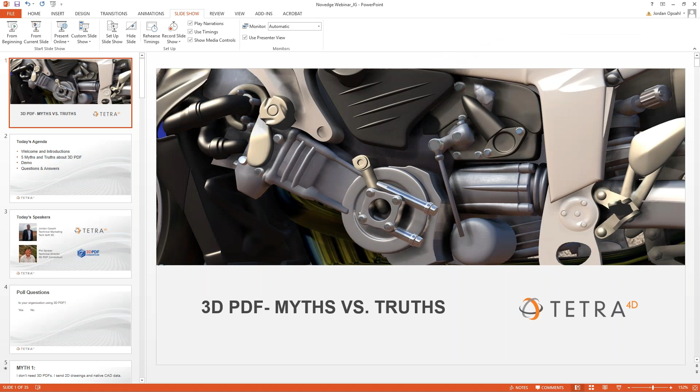Well, welcome everybody to 3D PDF Myths versus Truths. We're going to go through a quick housekeeping item with today's agenda, and we'll dive right in. So we're going to do some welcome and introductions. We have 5 myths to talk about today around 3D PDF. We have a couple demos, but a more deeper demo at the very end, and we encourage everybody to ask questions, and we'll provide answers at the end of the webinar.

As Barbara mentioned, my name is Jordan Opsahl. I do technical marketing here for Tetra4D on our end user product line, and joining us today is also Phil Spicer. Hi everybody, I'm Phil Spicer, the technical director for the 3D PDF Consortium. We do evangelization and promotion of 3D PDF in the engineering workspace, as well as working on the 3D PDF standards. So I'm very happy to be here, and thanks for having me.

Great, thanks Phil. All right, well to get things started, before we jump in, I'd kind of like to get a gauge from everybody and see how many of you are currently using 3D PDF. So Barbara's going to go ahead and start a poll, and if you take a moment, please answer if you're currently using 3D PDF or not, and we'll give you guys a little bit of time to answer.

All right, looks like most of our attendees are not currently using 3D PDFs. We have 18% yes and 82% no. So off to a good start. This is the right place for you if you want to find out more about 3D PDF. Well, that's exciting. I'm glad that there's a lot of people on the call today that don't know about 3D PDF, so I think this will be a great introduction.

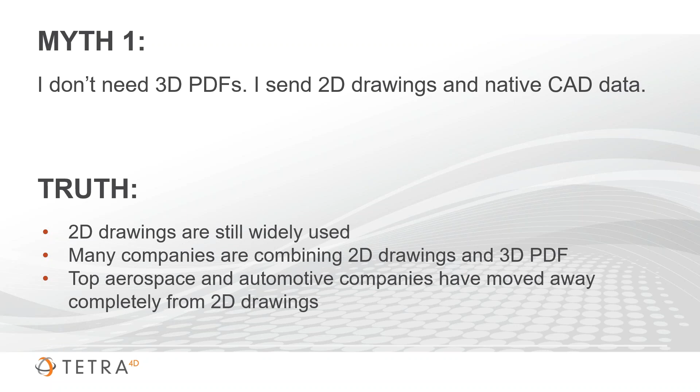So we're going to see how this has evolved over the years and how we've gotten to 3D PDF today. We're seeing dramatic improvements in how we're delivering engineering data, and this has taken some time. As we mentioned, many companies are still using 2D drawings, which is just fine, combining them into a binder. This is great—we've collected all the data, and it's more organized.

Over the years, we saw a shift into companies starting to do this digitally. What most of you are probably doing is sharing your 2D drawings inside a PDF, which is much more efficient in electronic form.

But now that everything is designed in 3D and 3D applications, many companies are starting to see the value, and customers are demanding being able to provide all that same information contained inside your drawing, but as an interactive 3D PDF, with all of it still consumed inside Acrobat Reader.

So we're going to show you a quick demo of how you create a 3D PDF with one of our tools and exactly what a 3D PDF looks like.

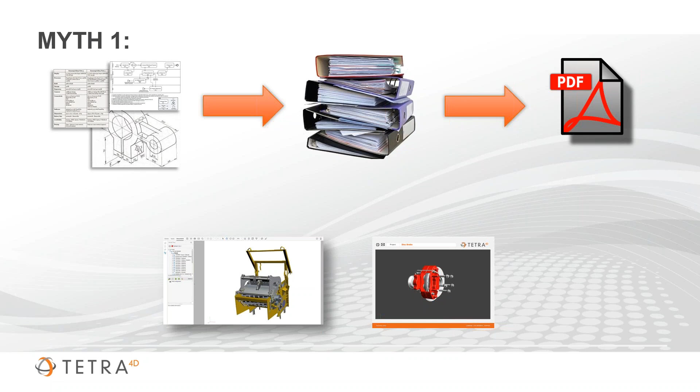With our Tetra4D Converter, we support over 20 CAD formats. There's a variety of ways you can create one: File, Create PDF from file, or you can grab your directory and drag and drop a CAD file into the application. Or I think the easiest way is to right-click and say Convert to 3D PDF.

So we're going to get our converter tools here, and I'm not going to go through all these in a lot of detail, but we can control the background color, change the lighting and how we want the lights to appear, and the rendering style—solid, outline, or illustration—and these can be adjusted as you get into the document too.

We have our view orientation, so it knows it's a CATIA file—I want to set my views being rendered as CATIA, and some other default options as well. We have a template option. Phil's going to talk about security and how you can secure your document.

From here, we get to control what information you want imported. We have full support for PMI and views, solid surfaces. And then finally, what type of PDF do you want—geometry or just a tessellated model? And then finally, we have compression.

The first thing you're going to see is this 3D toolbar. This just changes how you navigate the document. We can change from pan to zoom in and interrogate this a little bit more. We have some other options in the toolbar as well.

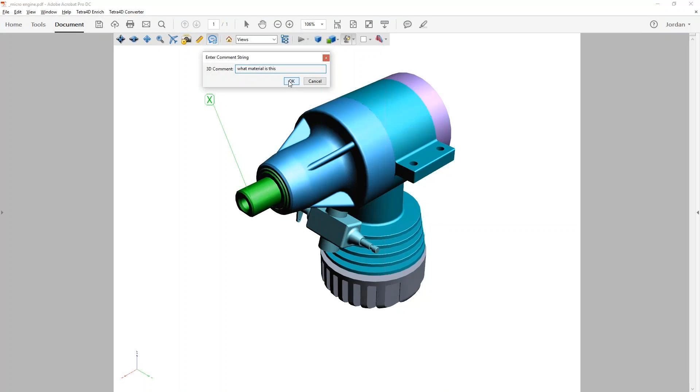For example, we can take a measurement. A really great collaboration tool is creating a 3D comment. So we can come up here, add a comment, and say, if we were curious what material this particular part is—we can enter that in right here and say, what material? Select OK. Now we have that 3D comment, and it actually got saved as a view, which we'll talk about a little bit later.

I can have access to my views here, so that 3D comment was just created, and those are all the views native to our CAD file. As I mentioned, we can change the rendering style back, and finally we can cross-section and create cutting planes in our model.

I'm going to hit the model tree here and open this up into Adobe Acrobat Professional. This would look the same in Reader as well. We can select in the model tree and have it highlight into our 3D model.

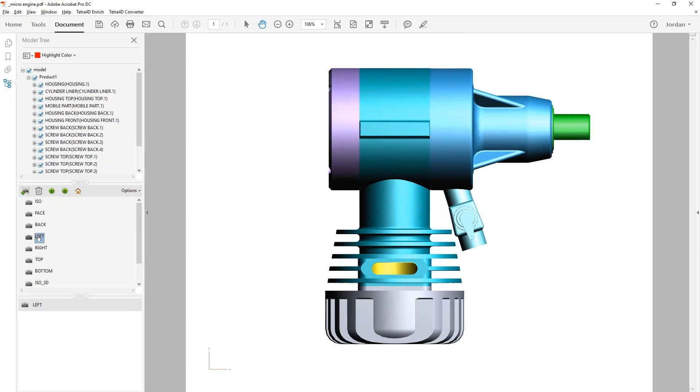This will change as I move through the model and select on the tree—it'll highlight those different parts. You also notice we have a view panel, so again, these are all of our views that were native to our CAD file. We can go ahead and select the bottom view or even the ISO 3D. And that new 3D comment that I made is stored inside our view panel here.

So again, there's still a lot of value in being able to provide this over a 2D drawing. Go ahead and go back to our home view. The last thing I want to point out is that you can also populate some attributes or metadata that was native to that CAD file. So again, the idea here is that you can still include all of your drawings inside this PDF, but having this interactive 3D model with all those CAD views is a very valuable tool for people.

And Phil's going to tell us next about the next myth around 3D PDF.

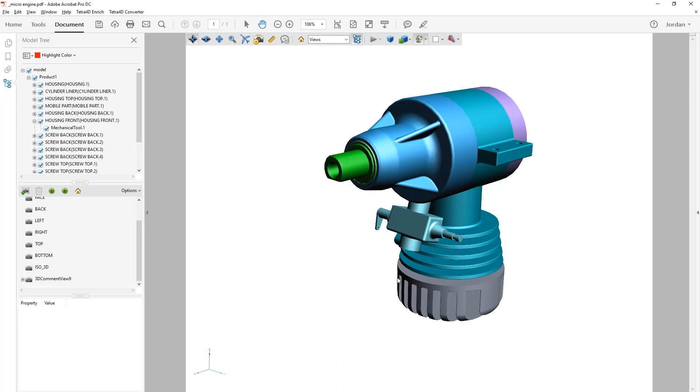Myth 2 is I don't need a 3D PDF because I can just zip all my files together. And while it is true that zip files are one of the most used formats for grouping and storing multiple files, for structured data they're often confusing and maybe not the best format. When I receive a zip file, the first thing I have to do is figure out what each of those files in it are. And many times people put a readme.txt or some other kind of manifest that tells you what everything is, and you have to go back and refer to all that.

In comparison to that, 3D PDF files are really good for structured data. One of the lesser known features of 3D PDF is that you can compress and organize multiple files all into a single PDF file. And you can do that using one of two functions. First is called attachments, and that just attaches them. The second one is called portfolios. Portfolios allow you to put folders and other types of things into your PDF file in addition to documents, and it gives you a nice visual user interface that allows you to navigate through all that and makes it easy to understand.

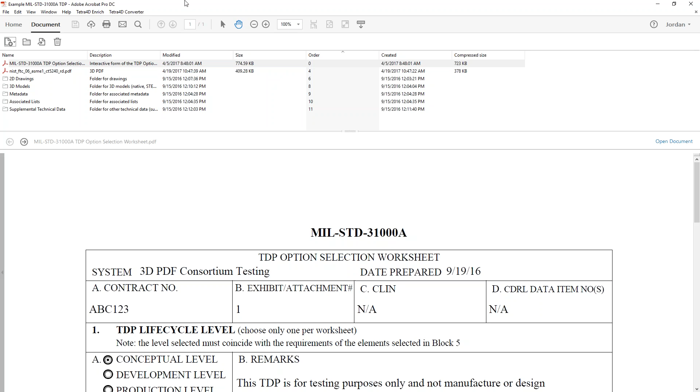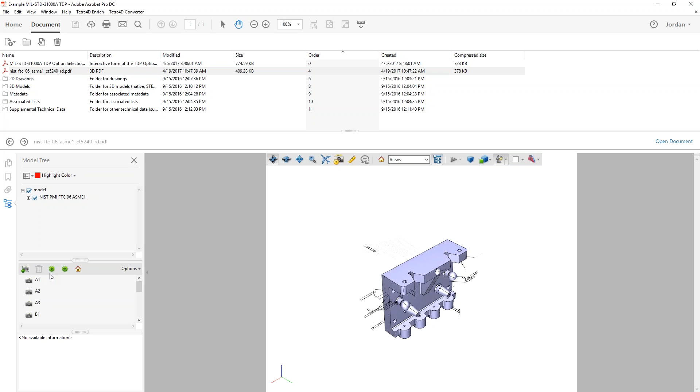So in this you'll see up at the top we have a little interactive environment that we can look through, and it shows all the files that we have in this. The first one is this form, the Mil Standard 31000 form, and it's actually a fillable and viewable form. You can use this interface to cycle through your different models or files that are in your PDF file. Here you'll notice we moved on to this NIST 3D PDF. You can activate that, and move through the views and other things, like Jordan just showed you in the previous demonstration. So all that feature functionality is already available there.

You can also add folders, and here you'll see I've created a folder for 2D drawings, where you can put your drawings.

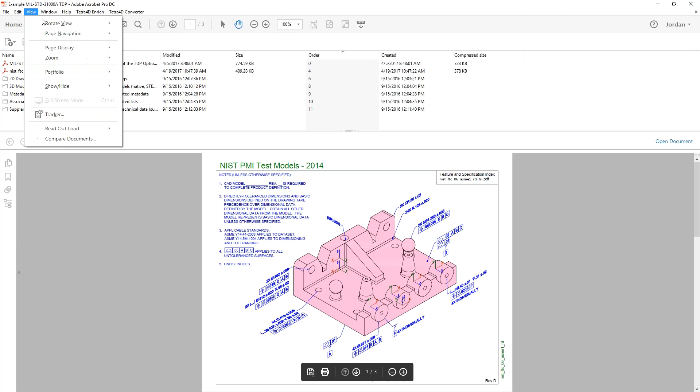Models and metadata, associated lists, all those things are available in here. You can go ahead and change the way you view these in a portfolio. Right now we're showing the details, but you can also look at it in a standard layout kind of view. And then finally, you can look at what we call the cover sheet.

The cover sheet is what's displayed when a viewer doesn't support a portfolio. So if you were to open this in, let's say, Chrome, which does not support the viewing of portfolios, this is what you would see, and it would tell people to go ahead and download Acrobat in order to better view that model.

So let's go back to our detail view there. You can also search the entire portfolio as well. Search functionality works across all the files inside your portfolio, and we'll find anything in there.

And then finally, we'll take a quick look at the portfolio properties, and it should allow us to take a look at some of the things. We put titles and other things in here. This is all available. You can get this data via an XMP format.

And you can also add security. Default is no security, but we can add password or certificate security. We'll go ahead and add a password. And when we do that, you'll see that we can go ahead and require a password. We can restrict things so that it doesn't allow printing or only a specific resolution.

And we can go ahead and see what changes they can allow, so they can insert pages, comments, and all those types of things. You can specify directly in here. So when you're done, you have a single PDF file that contains a whole bunch of other files, all in a single compressed and highly secure package. So we think that it's a really great way to deliver multiple documents in a single file.

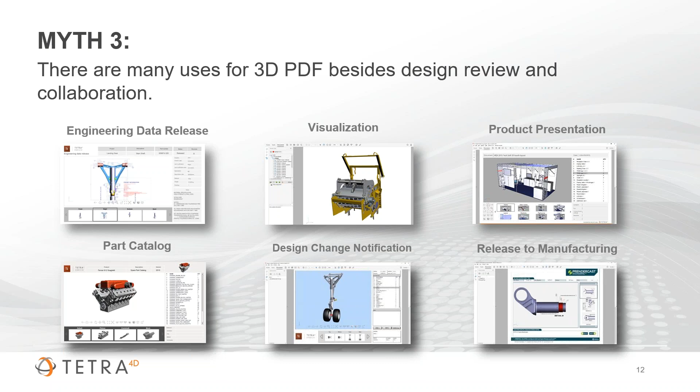So this is a technical data package that we created. We have our 3D scene that we saw earlier. We can easily go ahead and cycle through views with these easy access buttons.

So again, these are our native CAD views, with support for exploded views, and we have full support for that product and manufacturing information in there as well.

So the next thing I'm going to do is change how we pan with this. I can go ahead and cycle through my pan mode. Again, I can interrogate this by zooming in and out, and the idea is to make these tools more easily accessible so that anybody can interact with it.

So right now I quickly isolate a part. Say I wanted to change rendering styles to illustration, I can go solid, outline, or solid, and quickly go back to my home view as well.

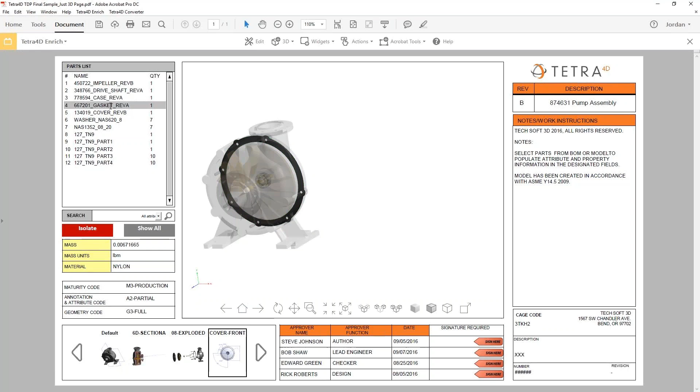So the next thing that I want to do is select on my bill of materials. You'll notice it's going to flash a bright green color to indicate that's the part that I'm selecting on. Right now I just selected the shaft, and so I know clearly that's the part that's associated to my BOM.

And the last thing I want to show here for properties is that when I select on this part, it's pushing that property information into that text field there, and that changes as I move through each one of those parts. You also have the ability to search the document right here in this PDF.

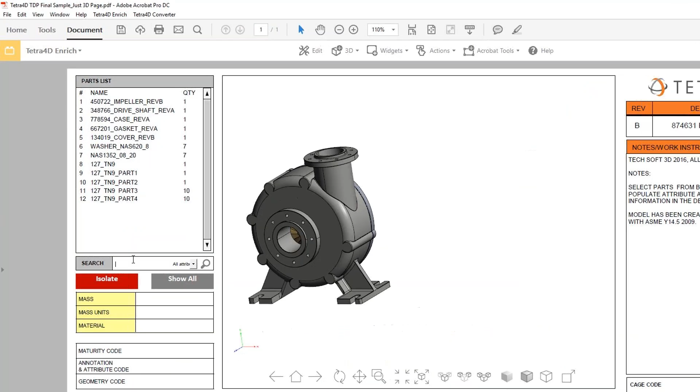So for example, I want to find all things made of steel. I know that those shafts and those bolts are made of steel inside of my model.

And then last, we have easier access to these views. Instead of having to navigate inside Acrobat, those views are easily accessible. And one thing that you're not seeing here is that we also have the original CAD file attached to this, and also those 2D drawings that created this technical data package.

So already I think you see that this is much more valuable than having just your 3D on a page, and much easier for somebody to understand and consume, and again, doing this all on Acrobat Reader.

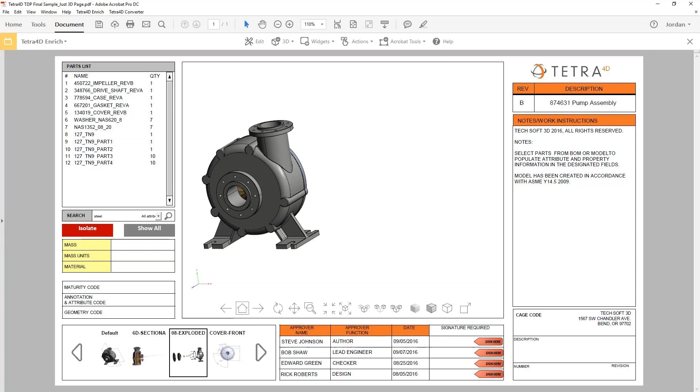Okay, coming in the questions. So far we have 50% of people using 2D drawings. Somebody's using 3D PDF, and somebody is still using zip folders. 20%, actually a few people saying the CAD viewer or native app is their solution. So, most of them, I would say 50% 2D drawing, 13% 3D PDF, 13% zip folder, and 20% CAD viewer or native app.

Okay, great. Thank you, Barbara, and thank you to everybody who responded. That's very interesting, and 2D drawings are still widely used, and we're seeing a lot of folks just including this 3D PDF in addition to that. So we'll talk a little bit more about that later.

Phil's going to take us into our fourth myth.

All right, so our fourth myth is that creating 3D PDFs is costly and inefficient. And that's really no longer true today. I'm not sure that that's ever been true, but certainly it's not today.

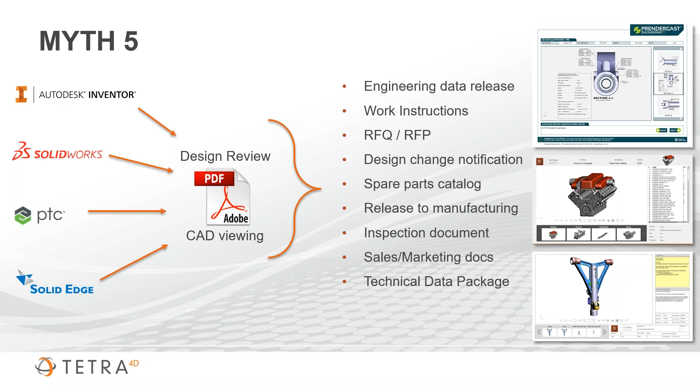But as we mentioned earlier, in addition to the cost of software, one of the things you have to really take a look at is how much you're going to save on the other end. And there's a bunch of studies that talk about the ROI that you get with this 3D PDF and MBD.

First, on the left here, an Aberdeen study looked at the cost savings realized when you have fewer inaccuracies and fewer errors introduced when you use a 3D PDF as opposed to a 2D drawing. That study showed that 60 to 70% of part errors or nonconformances are due to inaccuracies and interpretation errors you get using 2D drawings.

And you have to remember that 2D drawings always require somebody, a person, to interpret those. And because of that, they're often subject to errors in that interpretation. Then you have to go back and request a new drawing, or regenerate a drawing, in order to fix that. That's often a very costly proposition.

On the right, large manufacturers such as GE have reported they've reduced their tooling design times by as much as 75% using those model-based methods. GE Power, as a matter of fact, has made a large investment in moving to 3D PDF, and they've seen huge cost savings from that. It's even now featured in some of their annual reports, what they're doing. They're pushing 3D PDF out into their whole organization.

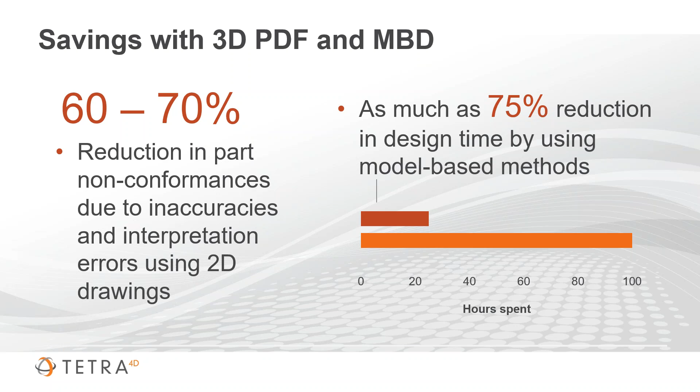So cost savings are something you always need to look at, in addition to what it's going to cost you to have that 3D PDF solution.

Now let's talk about one specific program at BE Aerospace that really kind of illustrates this ROI of the 3D PDF. If you're not familiar with BE Aerospace, they manufacture seats for aircraft, and they were working with Boeing on a first-class seat. These seats today are very, very complex. They have a lot of moving and mechanical parts, but they also have a lot of electrical parts. Boeing wanted to ensure that all the seats would meet their different requirements for electrical integration.

So they worked with BE on how they would do that. Now, in the past, what they would typically do is generate a 2D drawing and send that off to Boeing. These drawings were often very large and very, very complex. If they had a question, they'd ask for a new drawing that would give them even more information. And the drawings could take days or even weeks to produce.

And whenever there was an engineering change, those drawings also needed to be regenerated. So the cost of generating these was really high.

So Boeing and BE Aerospace took a look at turning to 3D PDF for exchanging their engineering data. They thought they would see some benefits from using the 3D model as opposed to 2D, and it turns out they were right. So they built a template that allowed them to integrate some BOM information into their PDF document, and they developed some custom JavaScript that allowed them to sort and filter the model based on different configurations. When they gave it to somebody, they could sort it, filter it, and view it in different ways.

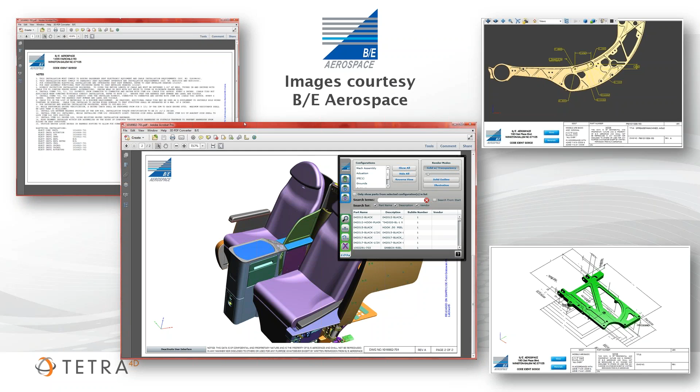And now Jordan's going to talk a little bit more about some of the PLM integrations in large-scale models.

Great, thank you Phil. All right, so coming into our last myth, myth number 5: creating rich, intelligent 3D PDF requires an enterprise-level solution or JavaScript programming skills.

As we've mentioned, the free 3D PDF exporters in the market are great for design review and sharing one CAD file type with others, and typically they're very easy-to-use tools. But the reality is these aren't tools designed for creating custom, interactive 3D PDF documents. And you actually don't need an enterprise-level solution to automate this process.

In the past, it was very common that you'd have to have a very heavyweight enterprise solution in order to automate the process of creating these. We've developed another tool that allows you to create these templates very easily on your own, and also a low server end solution to automate this whole process.

So now I'd like to jump into a demo on how you create one of these templates on your own and how to create one of these interactive PDFs.

Okay, so anything that saves to PDF can be used as your template or your canvas. I'm in PowerPoint right now. I have some text icons, some boxes, some text fields. I'm just going to go File, Export to PDF, give this a name and say Save. This is going to happen very quickly, but we're already inside Acrobat Professional.

This is DC Professional. We go ahead and access Enrich. The converter tool comes with Enrich. First thing I need to do is add my 3D.

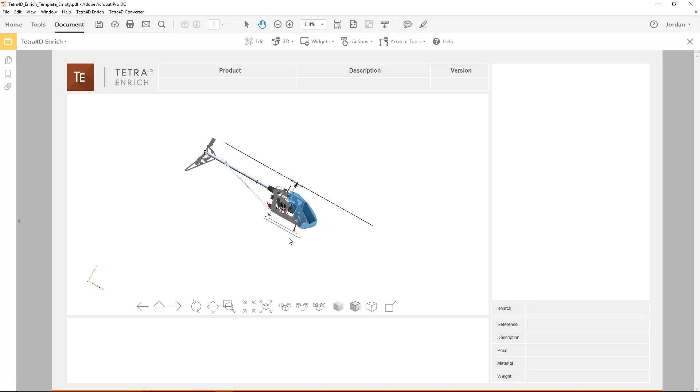Again, the converter tool is included with Enrich, so that CAD data translation technology is included with this Enrich tool. So we're going to let this finish off, and it's going to go ahead and populate our CAD file into our 3D scene here. So now it's active. We have our 3D model.

The first thing I wanted to do is add a parts list, a variety of ways. I'm just going to do a flat parts list, so again I just draw the size of my bill of materials here. So it pulled in all that information from our CAD file, and now I get to format it.

So I can change the size of the text here. I can change the type of font that I want. I can also change how I want this to be emphasized when I select on that, so I change that to green. I want this to flash like we saw in the sample earlier. And I also want to go ahead and show that you can edit this table.

You can add, remove columns, and even input new data into there. So right now I'm going to go ahead and see what metadata was included. A lot of different options here. I'm going to select part number, but I'll just leave this out.

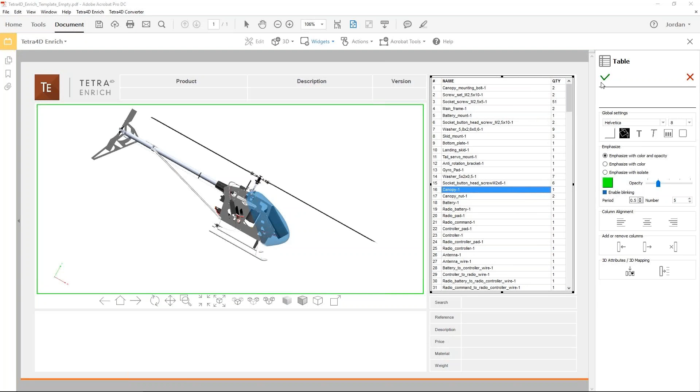I just want to show that you can customize this and include whatever information you want in that table. So I'm going to save that off, and now when I select in that table, it's going to highlight that part green. You can select another one. There we go. So that mainframe now is very clear, indicating that's the part I'm selecting inside my table.

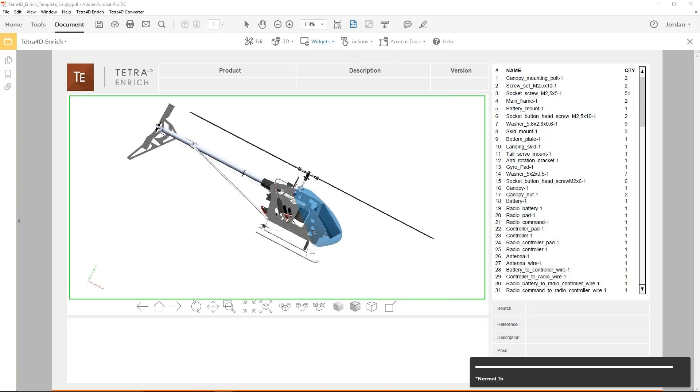The next thing I want to do is import those views that were contained inside my CAD system for this CAD model. Again, I just draw the size of my carousel, and it's very quickly going to pull in all those views. So again, now I get to control how many views I want, how many rows, how many columns. I can change the position of these views and where they appear and shift those.

So I can grab my isometric and move that all the way to the top. Again, just customize this. I can change the color, the font, the size. If you want more details, we have YouTube videos that go over this in much more depth.

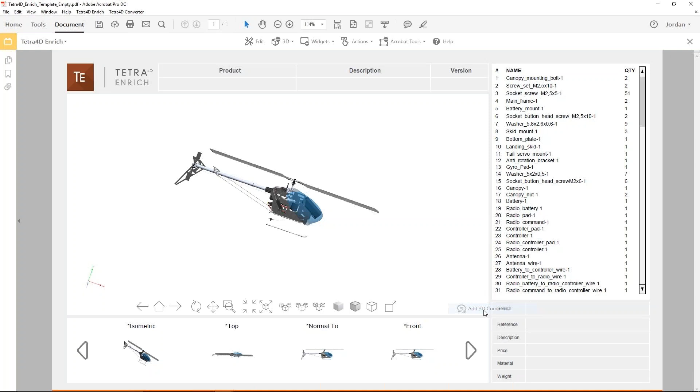One of the tools I showed earlier is the 3D commenting tool, and this really becomes valuable when you have a visible view carousel down there to see that view or that comment. So again, I'm just going to type in what material is this, select OK. That automatically is going to save this as a new view, but I can see that in my carousel now.

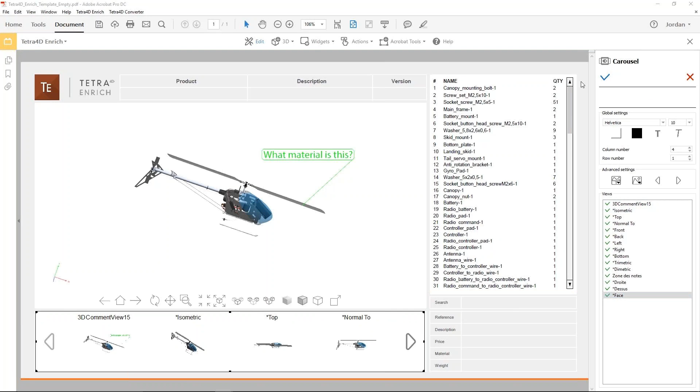So I'm going to go back in and edit that view I just created, turn that on. I want to push that all the way to the top so that whoever receives this inside Acrobat Reader, that's the first thing they're going to see. So we'll save our changes, go back to our default view, and we can quickly access that comment view I just created and all our other views down here as well.

So the last thing I want to do for this sample is go ahead and create an action onto one of these buttons. Again, these are all buttons or icons that you choose. Here we're changing the rendering mode to solid outline.

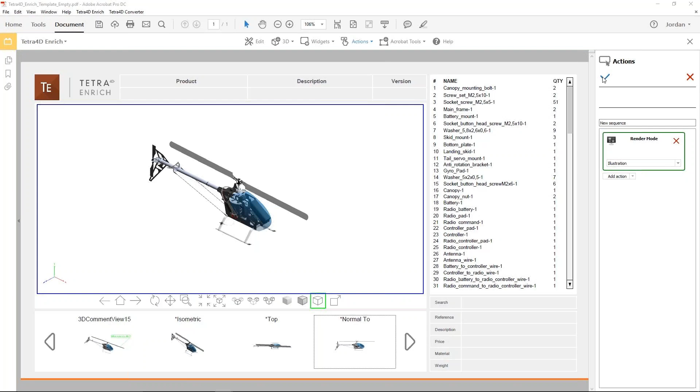We're going to save that off, and I'll do one more here for creating illustration mode on one of these buttons as well. So again, we come back into our action panel, change that to illustration, and select save. So now these are no longer just icons, they have an action embedded behind them, changing my render mode from illustration to solid outline.

And once you create this template, it's not necessary to recreate this every time. You create it once and populate it with new CAD data. So I'm going to come in and grab a new CAD file.

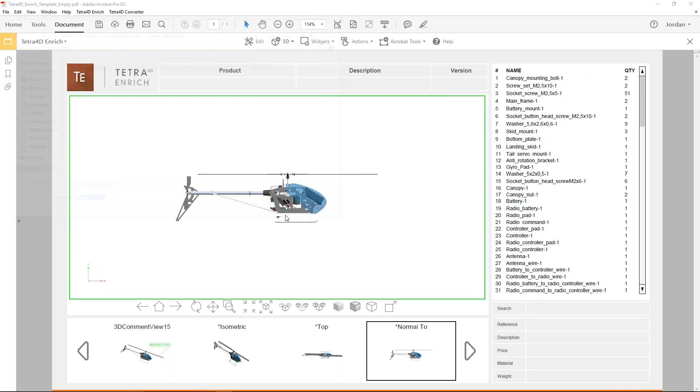This time I'm going to grab one of these compressed PRC files. That's our format used inside Converter that really compresses the file down to, as I mentioned, 95, 98% of the original CAD file size. So this is going to take a little bit longer.

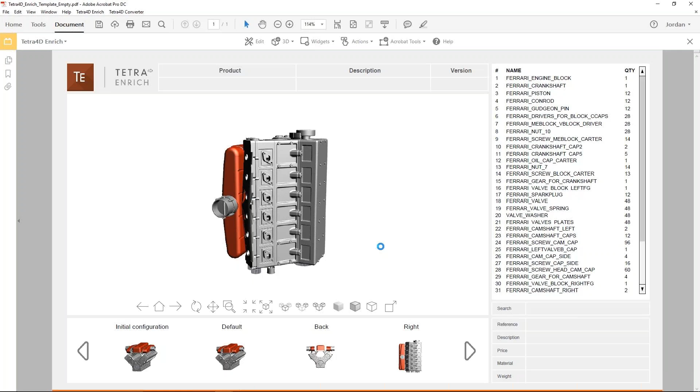It's going to populate a new 3D model. It's going to populate my bill of materials with new information. Right now it's pulling in all those views, and at the end we'll have a new model, a new template, but with all those other interactive elements still remaining. So my table's still working, my views are still working, but I'm not getting any material or metadata populating into those text fields down there, and I haven't set up an action for that.

So we're going to go ahead and do that real quickly. Say I want to add an action onto this 3D part. I want to populate text into a field. So we'll go ahead and select price, but we only have the component name for this model, and I mentioned we have the ability to import that information from an outside system like our ERP or PLM.

So I'm going to come in and say I want to add my 3D attributes. This is just an XML file.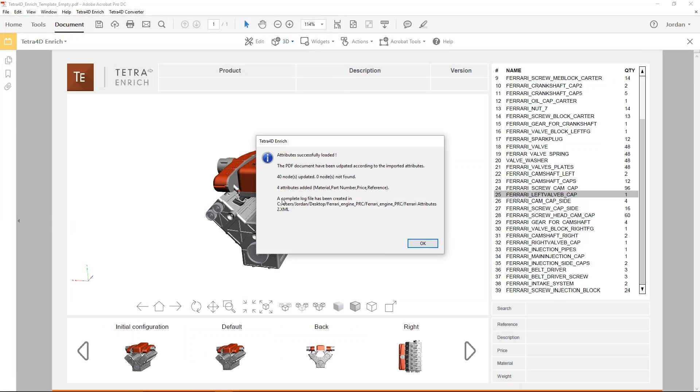Select open. It tells me that it was successful. It applied 4 attributes to each one of those parts.

So now I'm going to come back in, try this action again, and say select on the 3D part, set text in field. Now I want to update this price. I have that information now. All that metadata is accessible. We'll just do two here real quick. Add material, and we'll save and call that good.

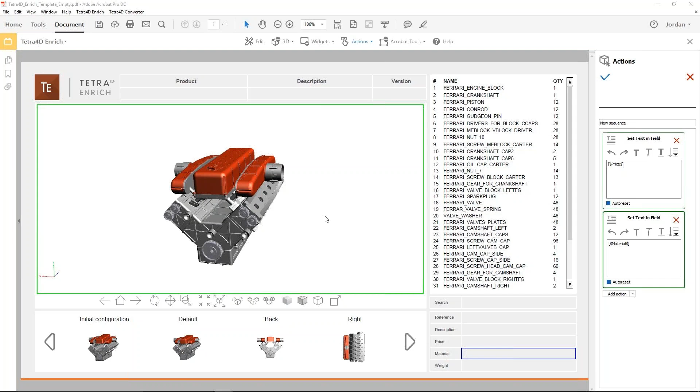So now when I come through and select on these different parts within the model, it's going to go ahead and populate the different pricing information, the different materials, all that information that we want the user to have quick, easy access to is still contained inside the document. And you can see it's active in my bill of materials. Our rendering modes are still saved.

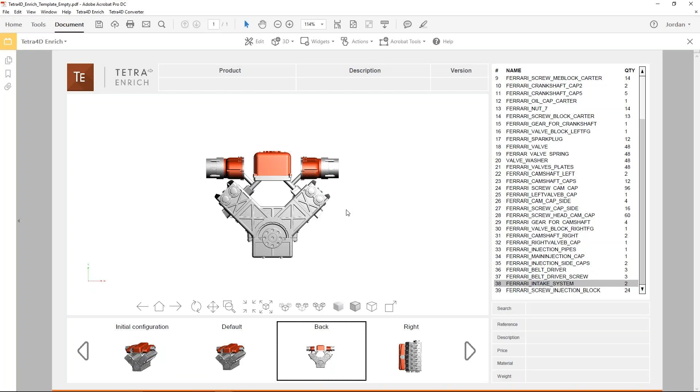So the idea is that you spend the time creating this, even though this one only took 5 minutes to create, you spend a little bit more time creating a really good template that's designed for a specific work group, and then you can just repopulate this with new CAD data as you move forward.

And one thing that we're not going to demo, but that I'd like to talk about is Tetra4D Automate. This is a solution that is a server-end solution to automatically create not the template, but to populate those templates with new CAD data. So again, the tool that you saw to create that template was Tetra4D Enrich. That created all those interactive elements like the bill of materials, the view carousel.

That comes with Tetra4D Converter. Converter can also be purchased on its own, and that is strictly the CAD data translation to 3D PDF, reading over those 20 major CAD formats. And then lastly, Automate, which is either done on an on-demand basis or typically in a watch folder, where you set up a template and it drives all of that CAD data from your PLM system into that template. So this is our Tetra4D product portfolio.

So I hope you guys found the demo useful, and Phil's going to tell us a little bit more about the 3D PDF Consortium and who's interested in using 3D PDF.

Yeah, so just a few words about the consortium. We are a worldwide community of organizations that represent different engineering practices and engineering software. This year, we're going to become the standards body for PDF, so we will be the administrator of all the PDF standards. That includes PDF, PDF engineering, and PDF archive. There's a whole bunch of different standards that are very useful if you're looking to future-proof all of your engineering data.